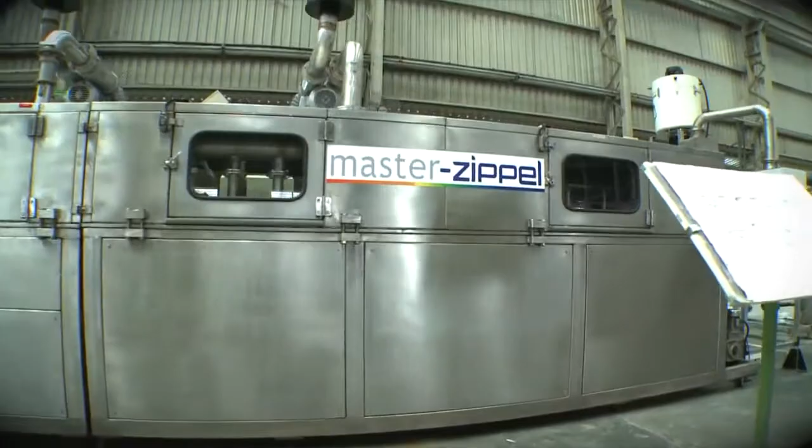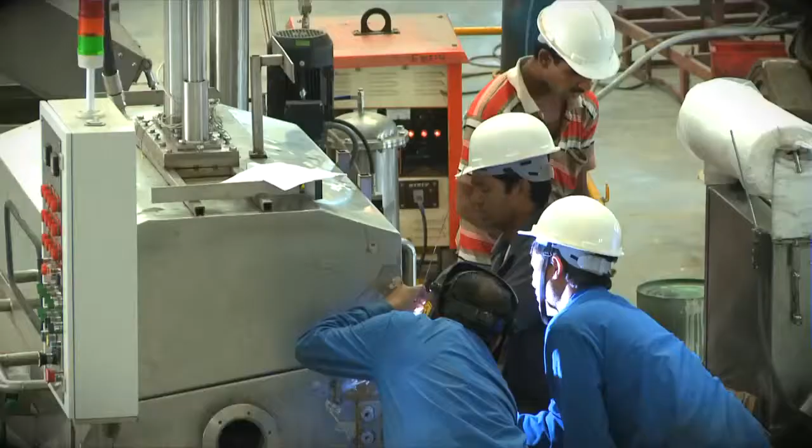Zippel has the solutions for washing, however intricate, however complicated, however difficult. And Master Handler has the technologies for material handling systems, because whenever you want to wash a component and ensure high throughput, it is never only washing.

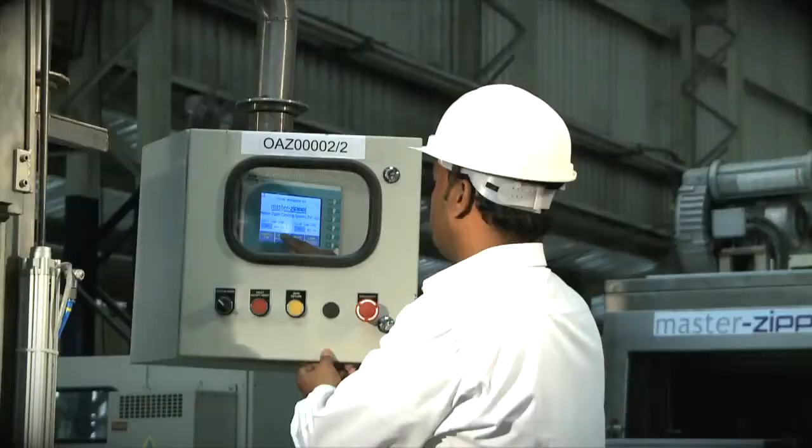It's washing plus automation. When Master Zippel started its operation in April 2010, the first and foremost challenge in front of us was to match our quality to market, and the quality of any equipment can be matched only by quality of design, and the quality of design needs a lot of support from the technology available for design. We have studied Solid Edge and also our old 2D platform.

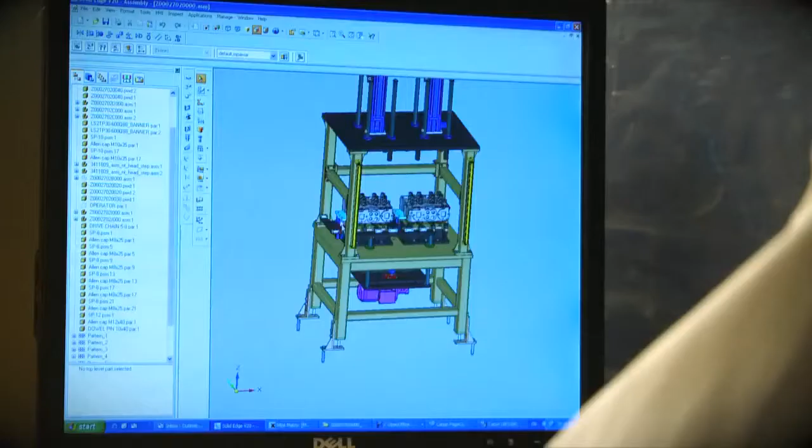Finally, based on our team's comfort and operative easiness, we have decided to go ahead with Solid Edge as a single platform for Master Zippel India. Very shortly in Zippel Germany also we'll be implementing Solid Edge seats, and that is where the two models don't have to be translated once again.

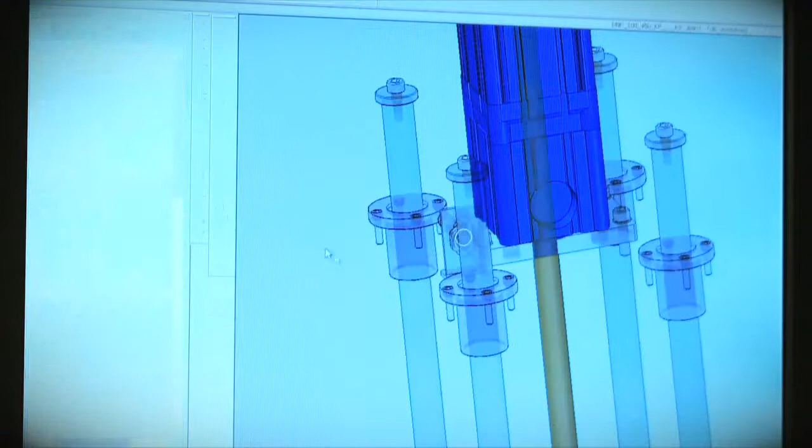At the time of design, one must understand the equipment in totality. There is less fouling of the components because the person who is modeling is more clear on the model, more clear on the machine right at the design phase. With the synchronous technology, the concepts are more clear.

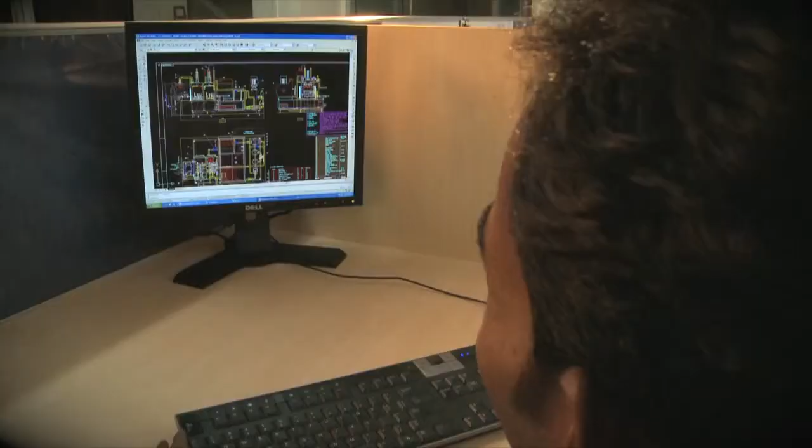The operators are being able to make the designs a little faster, maybe 8-10% saving on time available for further activities, and that is why the project timeline has really improved.

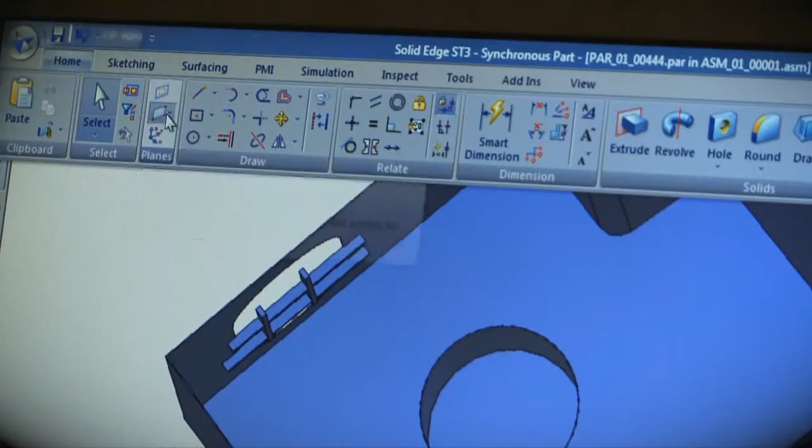Now my two main design engineers have become more familiar with the new on-screen commands and the on-screen tool features available, and more than that, the biggest benefit is the drop-down menus. That feature has really enabled them to use ST3 as a synchronous technology.

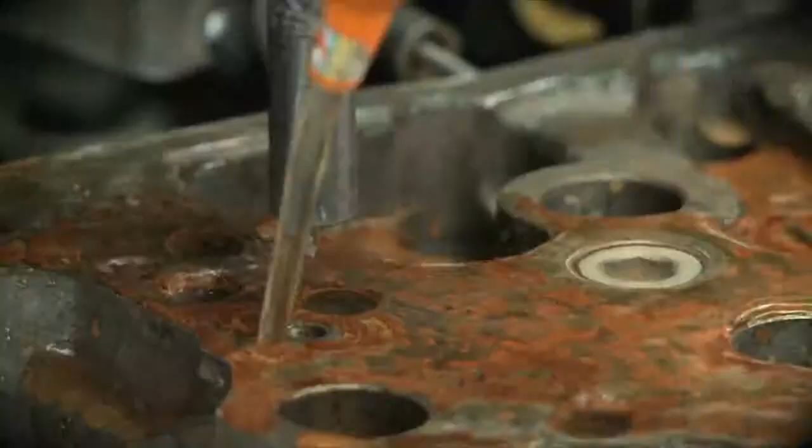And there is one fantastic feature in Solid Edge which is used more effectively for piping, cabling, and duct routing, so plant engineering, or we call it machine engineering, machine layouting.

We have linked our internal system, which is ERP, with the Solid Edge database to be able to extract the data and make the part lists available for our work.

Also, the biggest benefit is we are being able to standardize most of the items and use them as a standard library. The aesthetics of our equipment have improved, and the cost effectiveness, which is the bottom line of any organization, has improved because of the time reduction and the reduction in rework.

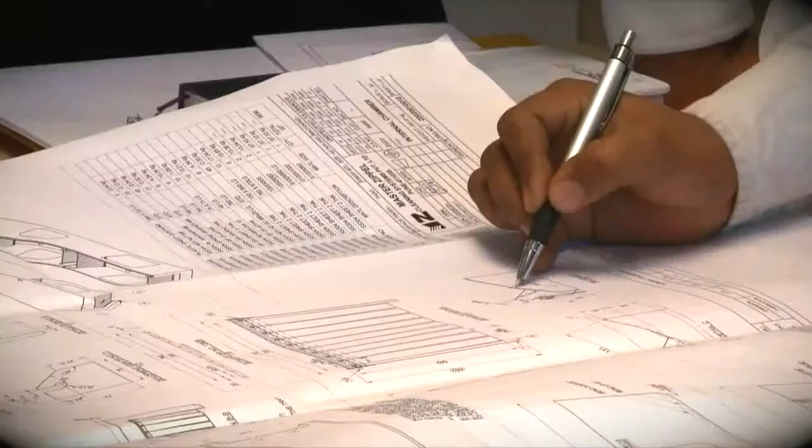In the next 3 years, we would like to become India's largest and best equipment manufacturer. Without support, it would be really hard. But now with Solid Edge, that is Siemens Solid Edge, and with associates like 3D Experts, it is only because of that we are looking for this software more and more.

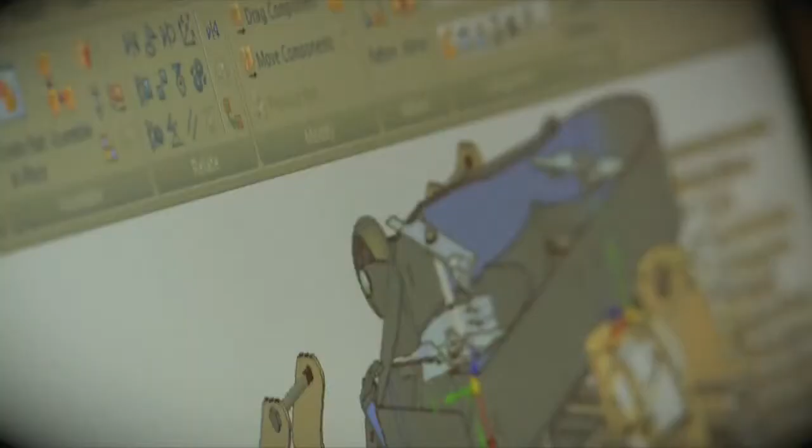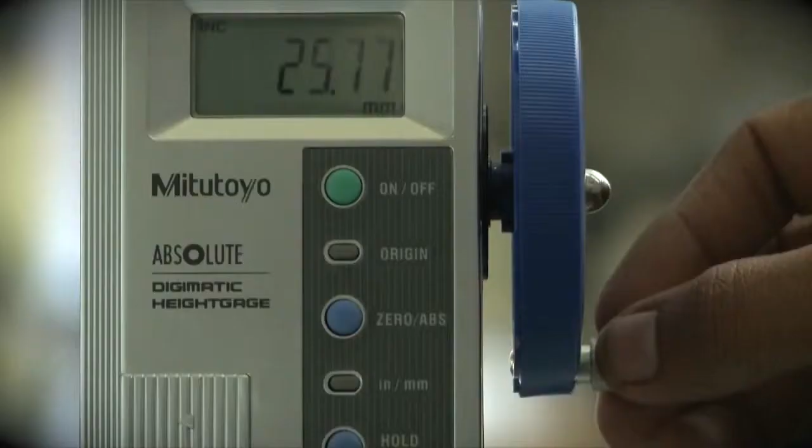Whenever any order comes to us, the project department is very happy nowadays to commit. Whatsoever equipment we have supplied so far, along with the Solid Edge support, all equipment has been very well accepted and very well appreciated by the customers.